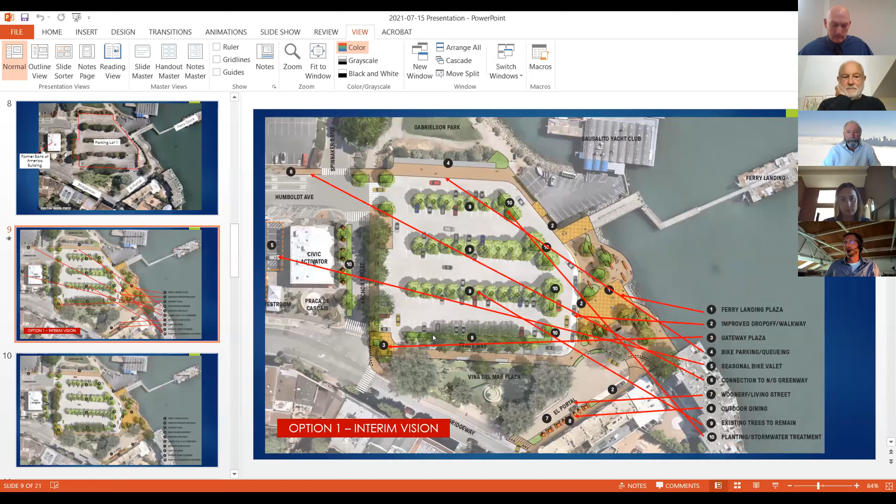All right, hopefully everybody can see my screen. It says the Ferry Landside Improvement. Yep, great.

This evening, I'd like to introduce some folks on the call, who are part of the local architects group and have really helped out quite a bit with the City of Sausalito, donating their time to this project. This would be Bill Hines, Michael Rex, Jacques Ullman, and Bob, who have really stepped up to help with the project. This evening, I'd like to start with a short presentation on the Ferry Landside Improvement Project, just to get everybody up to speed.

The second part of the program this evening is a presentation by the local architects group regarding their vision for the parking areas around the Ferry Landside area, with a bit more detail on parking lot 1. I'm hoping we can have public comment after each part to address the different nuances of each portion of the presentation. Even though the slide notes about an hour, if we finish the first part early, we can jump right into part two, the visioning. We'll have different speakers as well, as everybody knows.

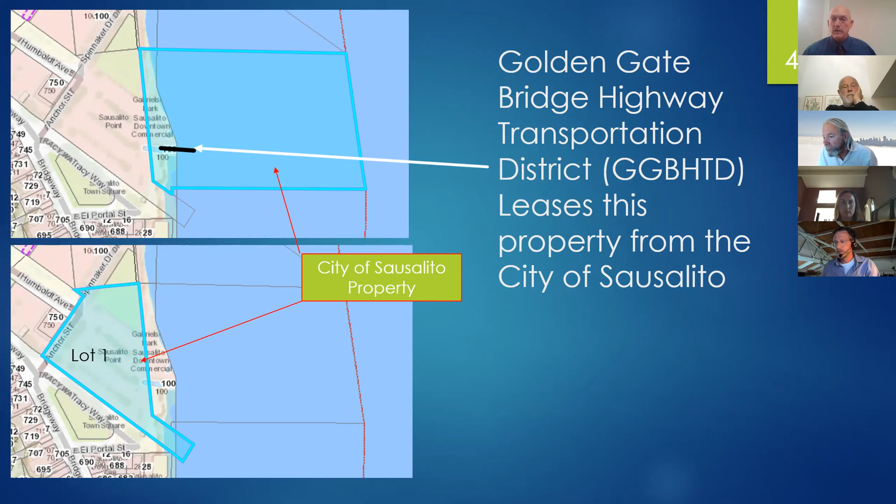I'll give a little background, just a couple pictures. The city owns the area where the Golden Gate Bridge Highway Transportation District docks their ferry. The city leases this property to the district. The district is planning to replace their existing ferry dock, and postponed that work during the recent pandemic, now anticipating starting construction in 2022. A little about their work: in order to replace the existing ferry dock, the district anticipates utilizing the existing dock, and I'll show some stuff on my computer here. Here's the existing dock—they're going to build a little walkway.

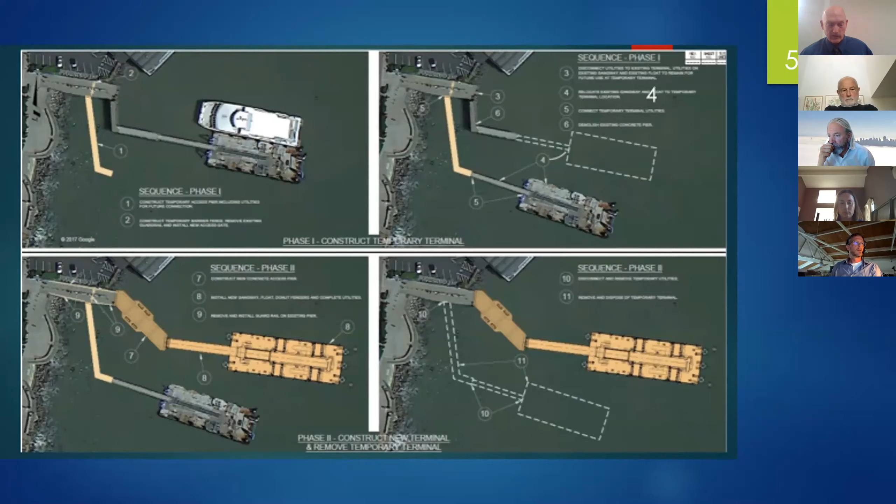They'll move this one over in order to build a new ferry dock. At the same time, they anticipate running the ferries during this construction. Most of the work on the ferry dock will be performed from the water side. However, the district has noted that the contractor may need a laydown area in parking lot 1 if they intend to do some work from the land side.

In October 2017, the city granted conditional approval to the Golden Gate Bridge Highway Transportation District to repair their dock system. Golden Gate has agreed to pass funding to the city from the Federal Transit Administration to support the improvements of the Ferry Landside project.

A total of $2.5 million is available at this time. This includes the design, construction, and construction management for the entire project. The grant language includes basic requirements to enhance the plaza area, enhance access to the ferry for pedestrians and cyclists, and includes circulation improvements as well as signage for the area. The project also requires installing a new ticket kiosk in the area. The local architects group stepped in and helped us with this specific project. The funding allocated to this project is also limited—total project cost of $2.5 million leaves approximately $1.9 million for construction. That's not a lot in this day and age.

Last year, the City Council recommended utilizing a local architects group to assist staff with this project. The group's goals included implementing improvements in compliance with a federal grant that conform with a long-term vision of this area of Sausalito. The main emphasis of this group was to develop design features that can be supported by the funding available for the project.

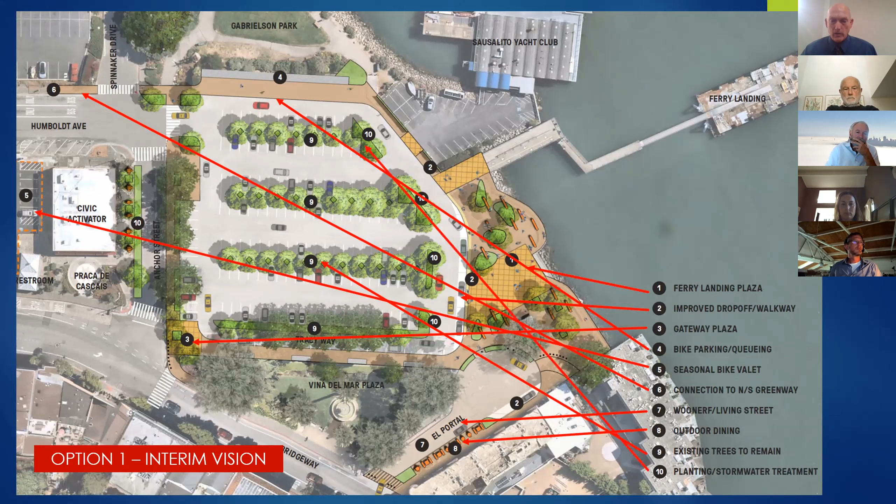Our arrows are kind of mixing up on the screen, but I want to run through these: a connection to the North-South Greenway and a more pedestrian-friendly area on El Portal, including outdoor dining. The intent when these folks originally looked at the plan was to keep the existing trees. Keep in mind this is a preliminary sketch, and once our engineer dives into the details, some of these may not stay in the plan because there isn't enough space. The group also looked at planting and stormwater treatment.

So that was the original schematic of option 1. The local architects group also came up with additional improvements to the area that can be added if funding is available. These include a pedestrian promenade from the former B of A building, as well as modifications to El Portal and pedestrian modifications in this area as well.

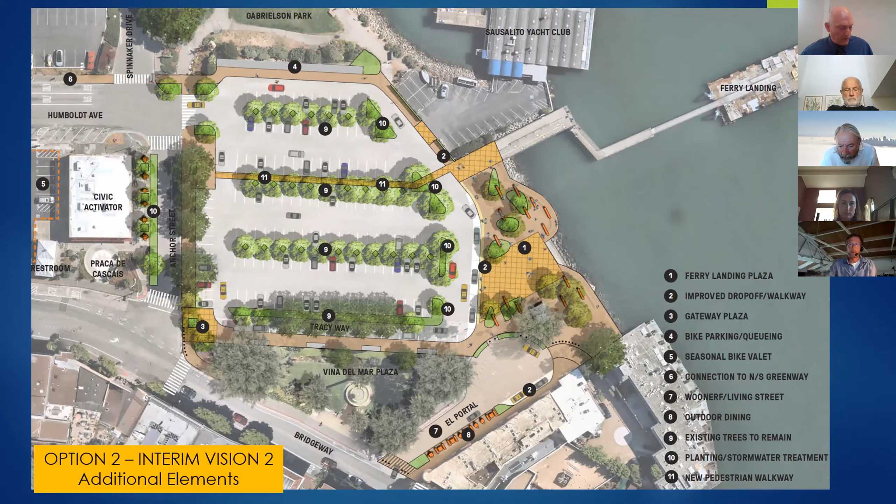Our consultant, BKF Engineers, and Becky Dower will make a short presentation in a slide or two. But looking at the details, there may be some issues associated with the trees, as I've mentioned before. Keep in mind that option 2 and option 1 are conceptual at this point. If this is pursued, there may be more reductions in parking to accommodate the promenade area, and a reduction of the bike queuing near Gabrielson Park may also be considered. If these alternatives are pursued, detailed analysis will be needed for the possible reduction in parking and other amenities. So with that, I'm going to turn it over to Becky Dower.

She is our consultant from BKF Engineers to talk about this detailed slide for looking at the engineering approach and developing a full construction set. So with that, I'll turn it over to Becky.

Thank you for the introduction. As Kevin noted, I am a member of the design team, and my role on the project is to take the conceptual design prepared by the architect group, as well as comments from the public, and turn those into drawings for construction. So on the slide in front of you here, this is a preliminary engineering layout of the improvements. This layout closely follows the intent of that conceptual option 1 that Kevin reviewed just a moment ago.

Underneath the exhibit, you'll see an aerial of the existing conditions, so that we can get an idea for how the new improvements relate to the existing improvements out there. Not shown for clarity only on this exhibit are features such as landscaping, furnishings, alternative concrete and pavement materials, etc. Again, those have only been omitted for clarity so that we can focus this discussion on the new improvements and how they relate to the existing features.

So the existing parking lot has 180 parking stalls. With this layout shown in front of you, we can accommodate about 157 parking spaces. That reduction of 23 parking spaces was made so that we can accommodate an expanded plaza area, as well as a drop-off area that Kevin had mentioned earlier. The amount of area transferred from parking lot use to plaza use is about 6,000 square feet. So said another way, the plaza is being expanded by about 6,000 square feet with this option.

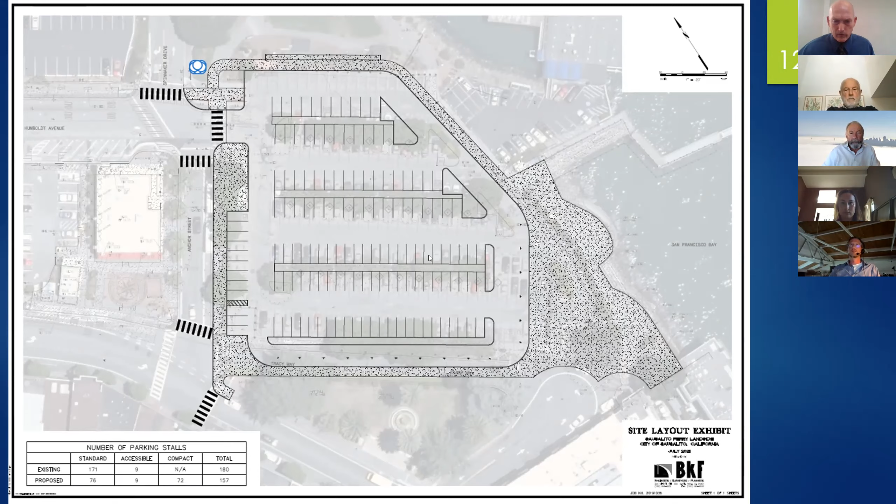Hold on, I think my screen got locked. There we go. Now I'm hoping that we can get public input.

I'm going to read through something first to hopefully jog folks' thinking on how to respond. For this part of the evening's presentation, I'm hoping to hear from each of you about what is proposed for this area of Sausalito. We kind of ran through that and I'm hoping you can comment on it. If you could limit your comments to 3 minutes, that would be great.

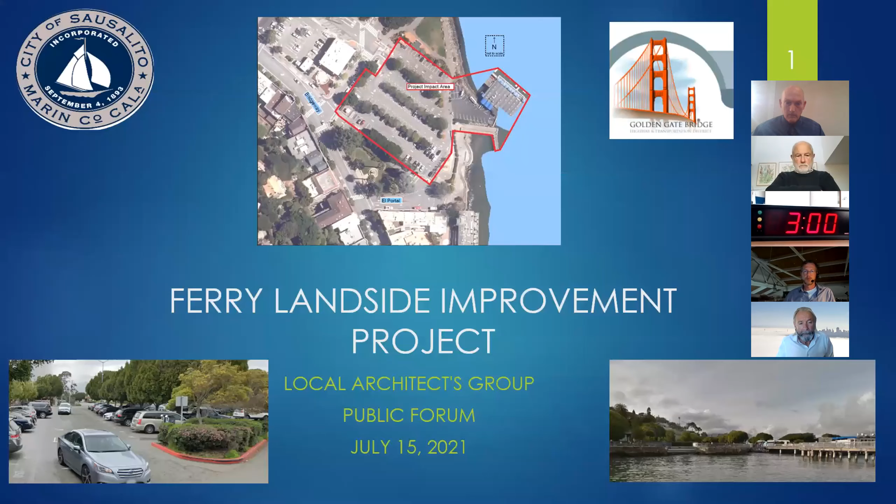For the last six months, the local architects group has been working on a long-term vision for this area. The scope of their vision generally looks at parking lots 1 through 4 and basically asks what can we do with this area of town. Their specific focus has been on parking lot 1, because that's where we've needed their help the most. Currently, there are no additional funding sources for this work beyond expanding past parking lot 1 with funding coming from the Golden Gate Bridge Highway Transportation District. However, some improvements we've described earlier may be impacted by what is intended with the long-term vision.

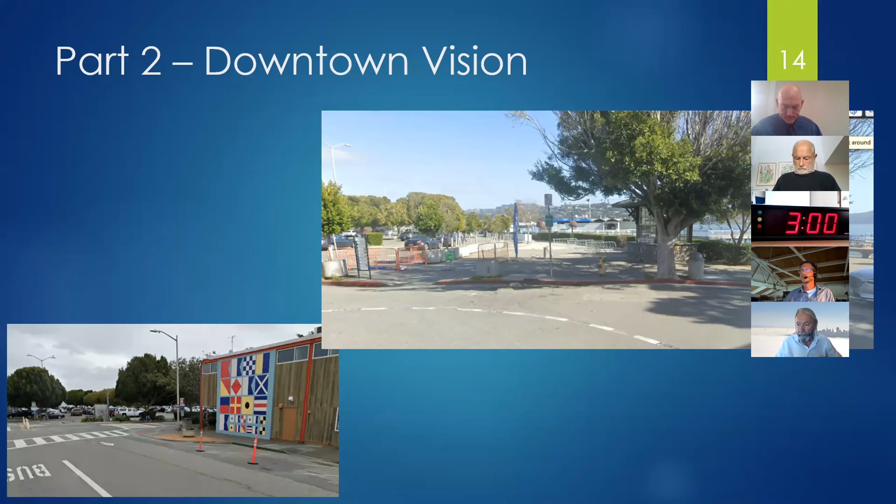A concept of what could be changed in this area of Sausalito came up early on when the architects just looked at lot 1. We've got things to consider, such as the parking setting. What could happen here? Do we keep the parking? Do we have partial parking? Do we look at a park setting? There are all sorts of alternatives here, and these amazing folks have taken a lot of effort to look into it.

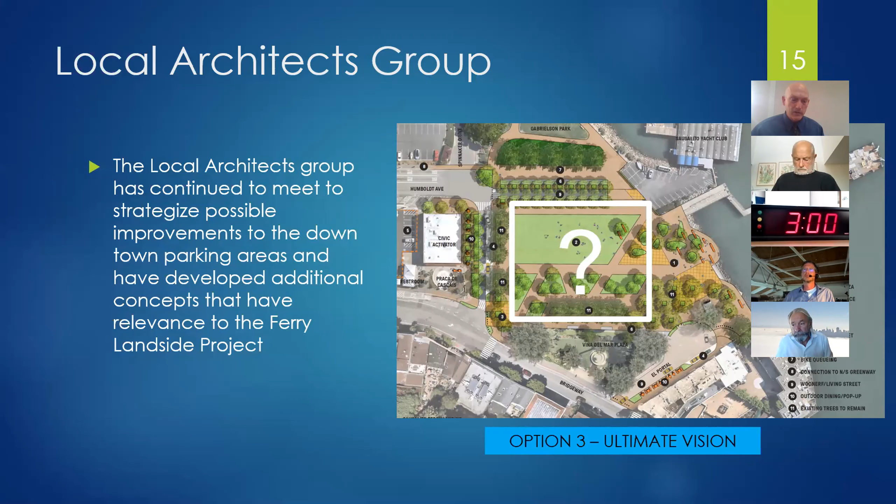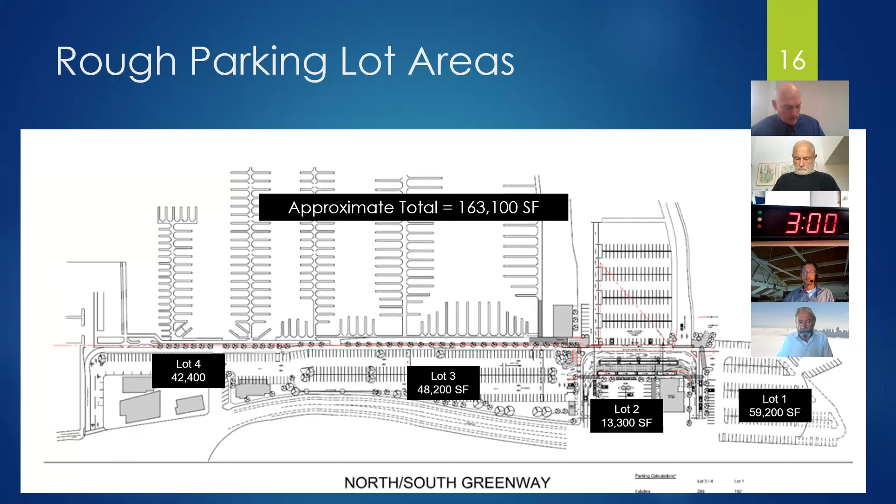Keep in mind that all of these parking lots 1 through 4 are generally connected. I've got some rough numbers up here—these are just approximate numbers of square footage, but like I said, they're all connected. With that, I'd like to introduce Bill Hines. He's going to take over the PowerPoint presentation and walk folks through some of their concepts. When he's finished, I have some additional questions for the public—we'd love to get your input as well. So with that, I'll turn this over to Bill, and thank you so much.

Thank you, Kevin. I'm assuming everybody can hear me okay. Great. My name is Bill Hines. I'm an associate principal with SWA Group, a worldwide landscape architecture and planning firm headquartered here in Sausalito. I've also been on the board of Sausalito Beautiful for many years, and I'm currently chair of design and leadership.

It's been a real pleasure working with fellow professionals on this parking lot 1 and ferry landing site project. This project initially got my interest several years ago, and we're excited to be at this point that engages all the various possibilities and stakeholders in a dialogue about the future of downtown. It's full of opportunities for beautiful, high quality public spaces with verdant landscaping and a statement about this unique community. Here's a photo of our site, part of downtown that's 91% paved from El Portal to Johnson Street, which collectively represents 12 acres of mostly asphalt that's undifferentiated for pedestrian use. There are many conditions that can be improved and represent opportunities. The Ferry Landing Plaza—this is an ideal view—should feature a waterfront promenade and a real imageable space.

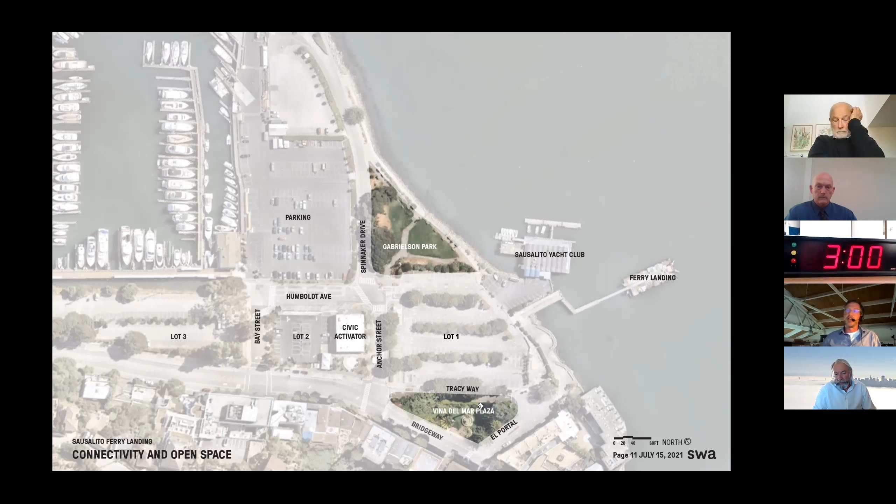So we've produced a few quick diagrams here just to show you how this concept would play out. Obviously, one of the most revered green spaces downtown is Vina Del Mar Park, and together with Gabrielson, they're kind of the green hubs, probably representing maybe 7.5 or 8% of the 9% of green area and green space downtown.

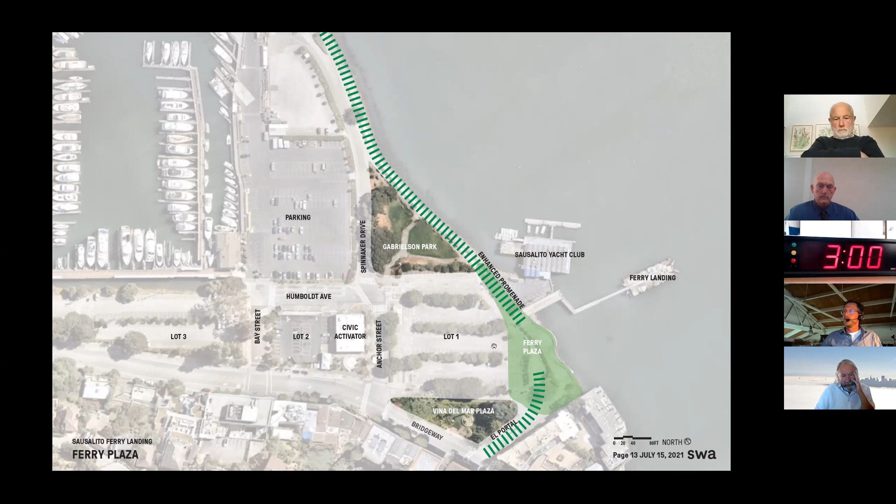There's the existing waterfront promenade, which heads up to Spinnaker and is the natural connection at the ferry landing, which is the midpoint between that and El Portal, which returns you back to Bridgeway. So there's a possibility of connecting all these spaces with this expanded ferry landing project. This is kind of the extent, loosely, of the interim plan: expanding this ferry landing plaza and making this connection here.

We've seen, through our studies and discussions about the possibilities for this parking lot 1, that there is potential to expand this area. And we think an important element, whether or not the expansion of the parking lot happens, is this gateway plaza at the intersection of Bridgeway, Anchor, and currently Tracy Way that I described earlier. Potentially, if lot 1 gets incorporated into that idea, there are ways of facilitating circulation between all these elements, and actually setting up the North-South Greenway, which could happen along Humboldt or potentially ultimately along Bridgeway.

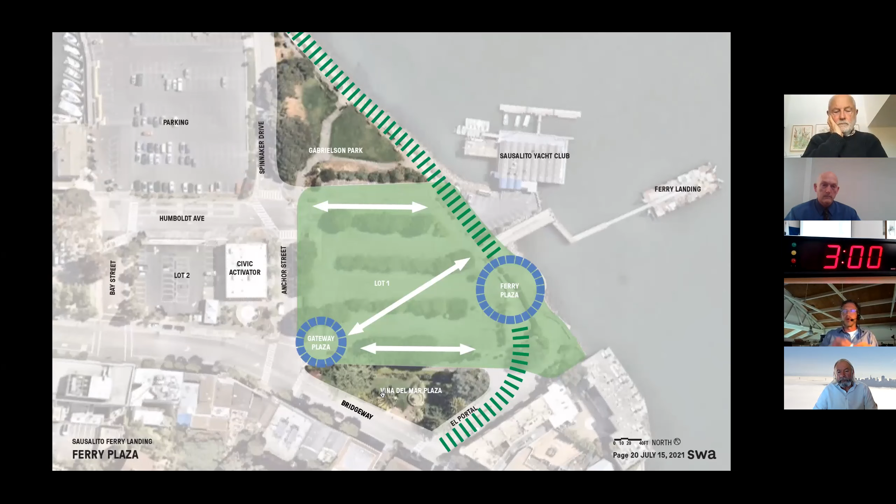So that's an overview, at a high level, of how we're looking at this plaza project. From that, we developed some basic principles of design that I'll quickly outline here, which played into our thinking and that we've incorporated into the project so far.

Waterfront views and maximizing views of the bay is a paramount consideration. Making a visual and physical connection to Gabrielson Park and the Spinnaker Peninsula is important, along with the connection to El Portal.

The focus should really be on pedestrian and bike improvements, expanding the existing footprint for better pedestrian circulation. We should really avoid repaving or restriping the parking lot, even though the condition is poor, especially given this discussion and the fact that we aren't ultimately sure what we want to do with the parking lot. The parking lot requires a pretty significant investment to keep it in parking, and I think the business case for that should be looked at further if repaving the parking lot is a favored idea.

There should be a sense of arrival in the plaza with wayfinding and distinct experiences, and an opportunity to diffuse in the space and have a few choices. There should be a starting point for future circulation routes along the waterfront and the North-South Greenway.

The access to the hotels, the drop-off and service on El Portal shall remain, but the street shouldn't be open to everyone to use. Expanding the sidewalk cafe adjacent to those businesses in a shared street bordering Vina Del Mar would be a great use of that space.

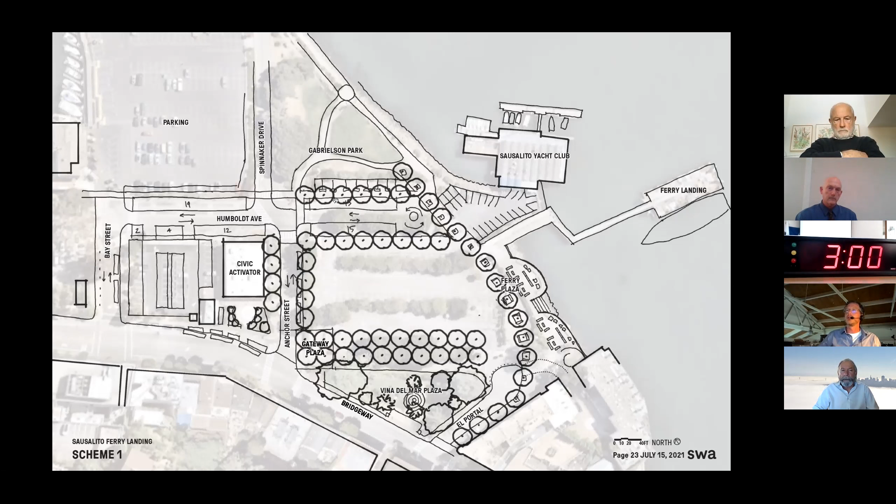This first scheme, scheme one as we're calling it, responds to the need to keep some convenient parking in current lot one. This could be seen as a strategy of reducing parking over time. But essentially from an urban design standpoint, the parking we're looking to keep here is situated in a way that it bifurcates Gabrielson Park from a potential plaza or park space in parking lot one. But because we need to facilitate access to the Sausalito Yacht Club, we don't think that this is necessarily a negative, and it may in fact represent some opportunities.

The drop off for the ferry landing would happen down Humboldt at sort of a turnaround. Bus drop off could happen along Anchor and Bridgeway and Bay Street as it currently does today. We show buses on the opposite side from Bay as they currently reside, in front of the Ice House.

And the bank of bike parking against Gabrielson is ideally situated along a natural circulation route for bikes. So this may be a bike parking area that's attended to when demand needs it, or it could just be a typical self-park type environment when that service is not needed.

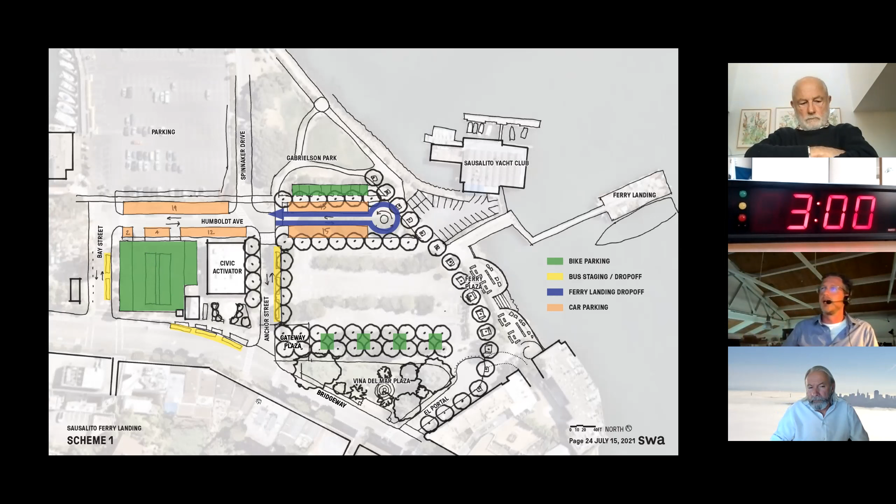So without getting into too much detail about the plaza or a park or exactly what happens in this program, this is sort of how we're seeing the surrounding urban design elements. As I mentioned, there are some variables in this scheme, based on the need for parking, bike parking, drop off, and access to the ferry.

So we took a look at another alternative here, which might function for a special event, thinking that there might be a zone of paving that could potentially be bollarded or closed off and still leave some access for the yacht club when a special event needs to happen.

Now the special event area could ultimately be a bike valet area. This could be a potential venue for a farmers market or pop-up booths, food trucks certainly. So the idea is that by providing some bollards here, we can close this area off and make it flexible.

And by doing so, make it a little bit more porous to people if we don't have constant vehicle circulation. In a scenario like that, the close and convenient drop off to the ferry landing would need a temporary staging location, and thinking that can happen along Bridgeway, with the drop off movement coming through here.

It's interesting to note that the distance of walking from the ferry boat to the ferry landing is really about the same as walking from the ferry landing to the B of A. And I'd add that most people, if they're going to San Francisco, usually have a bit of a walk on the other end. So asking people to walk a little farther in a scenario like this is not totally unrealistic.

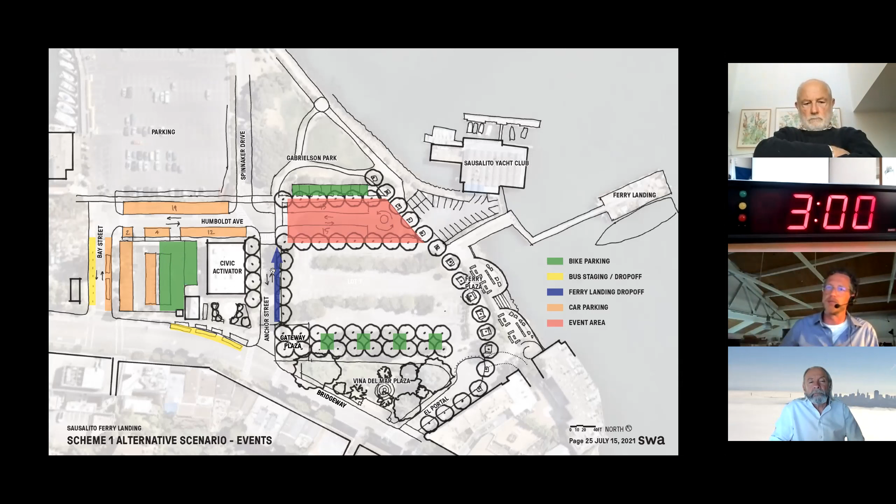So under this scenario, there'd still be a bank of convenience parking on Humboldt, which doesn't exist today currently, so these are new spaces. We're able to keep the existing spaces in Lot 2. The green area designated as bike parking could also function as regular car parking, so basically all of Lot 2 and the parking along Humboldt could stay intact.

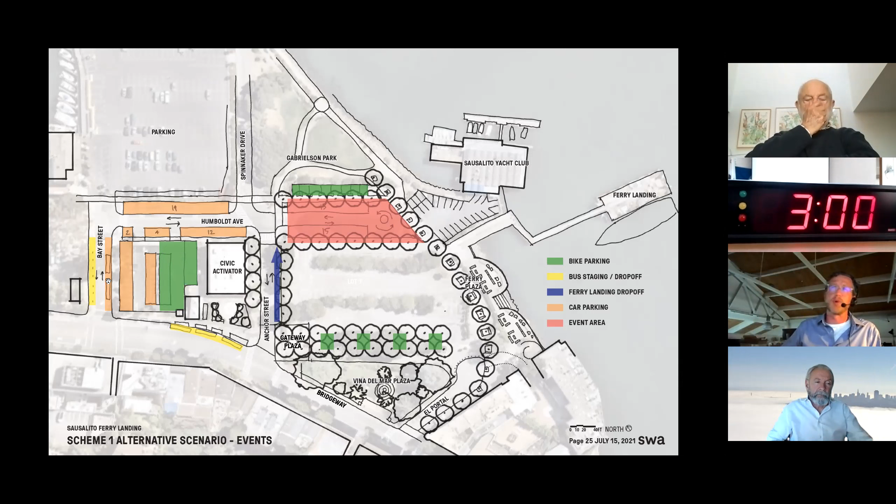And we can talk about people's preference for bus drop off, whether that's better to happen on one side of the street versus the other, if one side's cars, car parking versus bike parking.

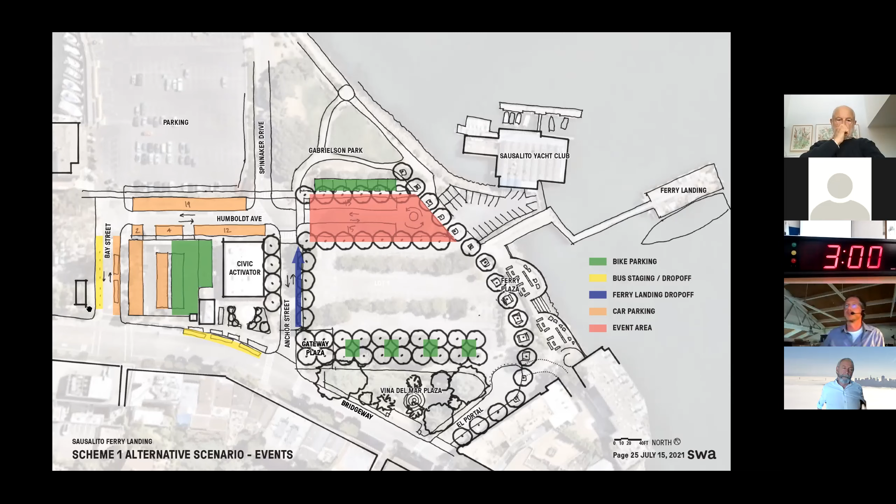So we have another scenario that we've taken a look at. This is the scenario that really just facilitates vehicular access that needs to happen for the parking and deliveries for the yacht club.

And really looks at formalizing this more as a plaza park environment, endeavoring to keep vehicles out of this zone aside from access to the yacht club parking, and takes another look at Anchor and whether it's fully necessary.

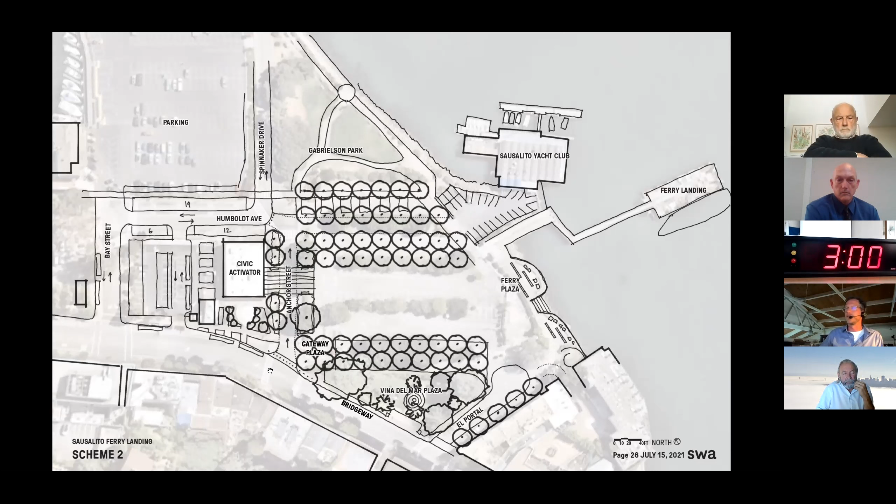It does that by keeping the existing bus staging along Bridgeway, making an entrance into parking lot 2 so there's actually a drive-through for the buses, and there could in fact be some bus drop-off back behind the B of A, with the parking there also functioning as valet bike parking on an as-needed basis. So this, together with the buses and bike circulation, is sort of a centralized hub of transit, especially if you're not driving a single occupancy vehicle.

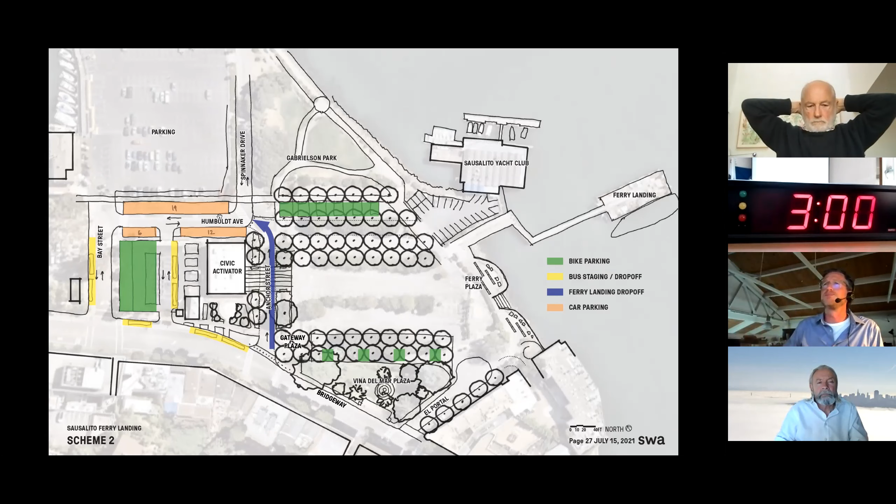In this scenario, we envision Anchor entry getting closed off by the Gateway Plaza. We envision Anchor as a one-way street that would bring you through and could bring you out through Bay Street to loop around the block. So the idea is that you could come in, drop people off for the ferry landing, and they could walk out through the plaza or park space.

The other ideas about bike parking are pretty similar - a fairly dense area of bike parking on the backside of Gabrielson Park, with some potentially small groups of racks along the sidewalk, along the back of Vina Del Mar, just providing a place for more locals to stash their bikes.

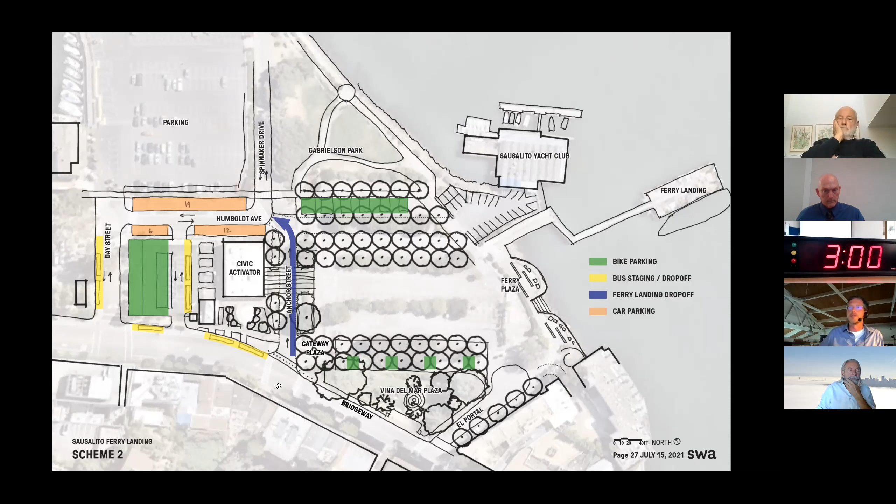We took a look at an event type scenario because one of the things that intrigued us in looking at the downtown design and the big picture was, is Anchor Street really necessary? And in closing Anchor Street, does that represent an opportunity to make the connection to the plaza or park space better than it currently is, and even better than we've seen in some of the different alternatives we've been looking at.

So the idea here is that we could have some temporary bollards that could be installed during special events or certain times of the year that would basically close off Anchor. We would still be able to provide access to the yacht club and their parking. But the idea with Anchor being closed is that you facilitate this pedestrian connection across here, and this could happen on an as-needed basis.

So the idea is that when Anchor's closed, people could be dropped off to the ferry landing right on Bridgeway. This Bridgeway streetscape has been expanded quite a bit to reduce the length of crossing. There could certainly be a bulb-out or other ideas for pulling in for a drop-off, similar to what we have here. But basically all this is available for drop-off.

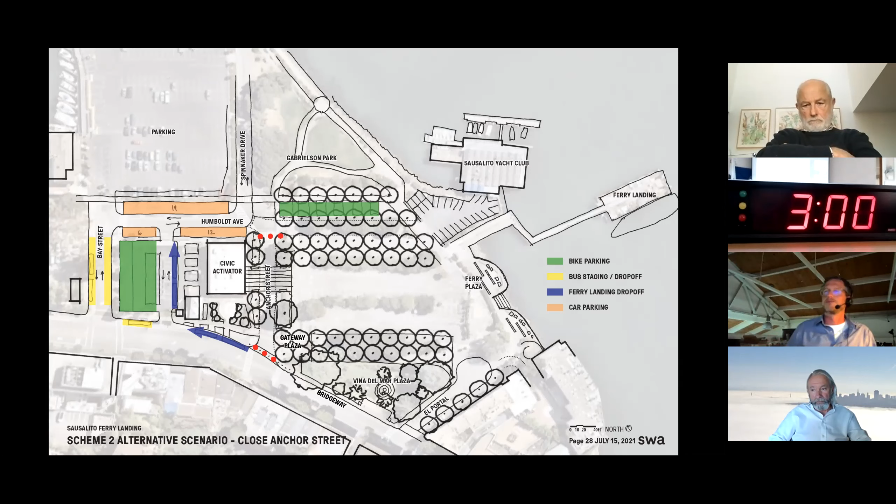We have a few key moments that we've tried to capture with a couple renderings. This view is down by the water, looking out from the El Portal intersection. And if we go back to some of the previous views, you recall that everything is kind of encumbered by some of the temporary guardrails and signage and other wayfinding elements that are in the courtyard now.

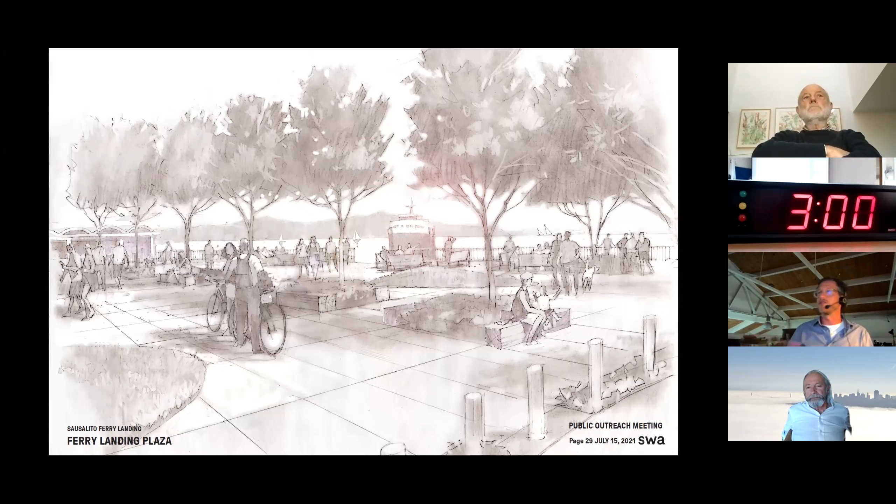We really envision this as more of an open plaza, with some planting and nice seating that would allow for a certain amount of activity at this end of the plaza. A lot of this isn't really baked into the current scheme. It's compounded by the fact that circulation is bifurcated by the hedges, guardrails, and temporary fencing that's put up. So this is the idea we're trying to espouse for the Ferry Landing Plaza.

We haven't done any full renderings of the parking lot, assuming it's going to remain a parking lot or potentially transform into a plaza, because we really wanted to reach out to you, the public, to hear opinions and thoughts on what you think should happen there.

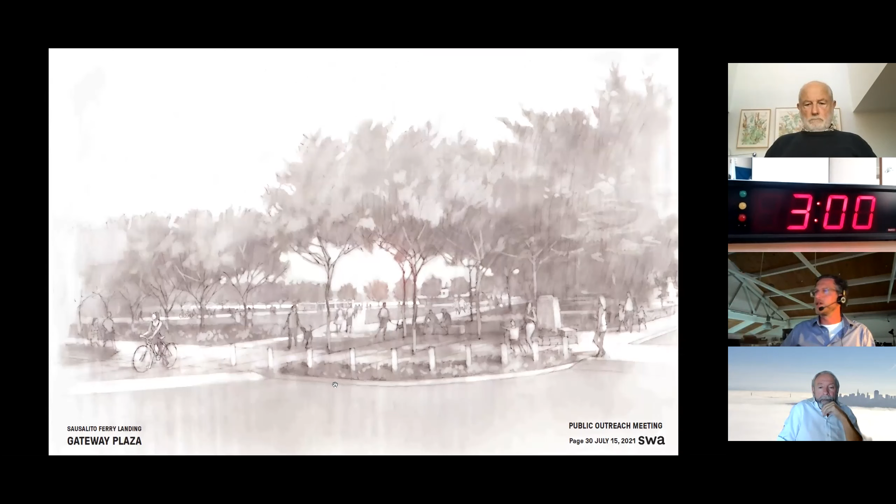We have done another rendering here. This is the El Portal—sorry, the Tracy Way, Bridgeway, and Anchor intersection. This is the idea about closing off this piece and the end of Vina Del Mar, capturing it as a gateway plaza. There's the possibility of setting up visual access to the ferry, with a long view across a flexible use space that could accommodate a bunch of different events.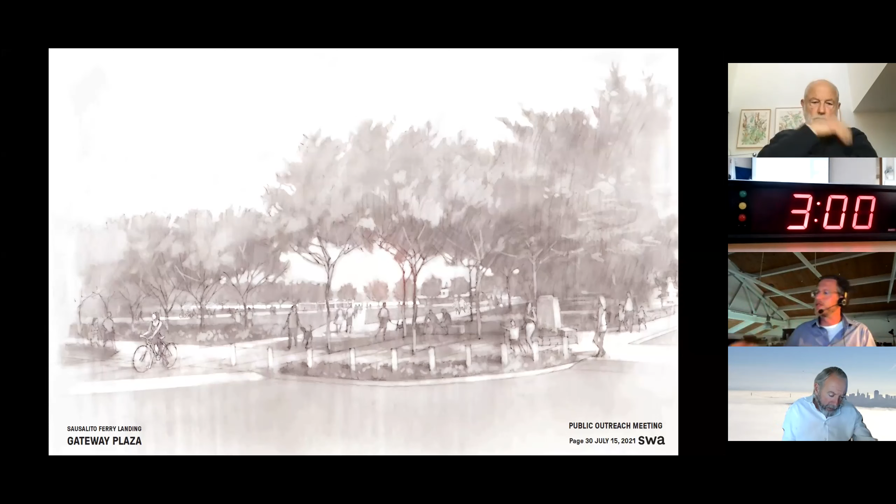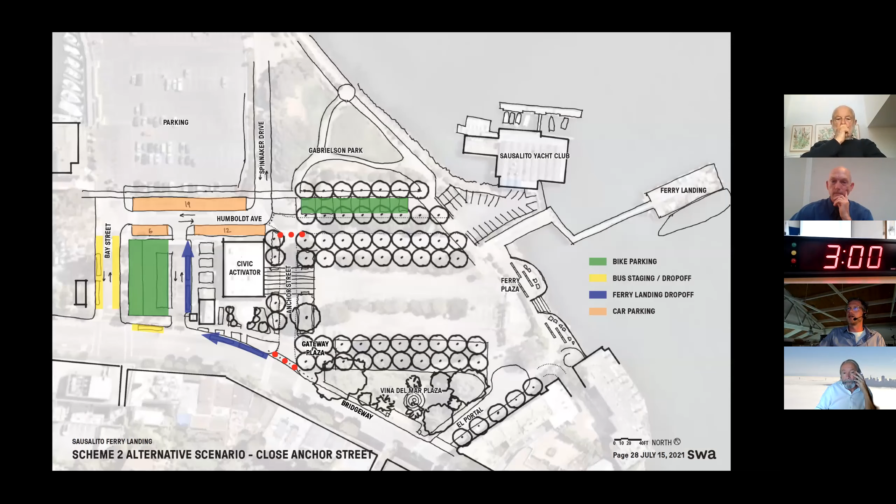I think we've talked about a number of ideas for this plaza and area. The big idea—going back to the diagram—is that the pedestrian and bike ideas shown in these design studies are really just refinements of existing use patterns we've observed on the site, trying to provide ample space for these different uses. There have been quite a few debates in our working group about the amount of plaza versus softscape.

There's discussion of how to situate outdoor rooms and gathering areas with furniture, thoughts about whether there's some topography, mounds, or a hill, whether there are event spaces of different sizes and what kinds of events they should accommodate, how bike circulation and bike parking should work, and how to think about planting trees. One potential thought is that trees could go in elevated planters so they're less vulnerable to sea level rise and a rising water table.

Certainly the expression of sea level rise response should be something espoused in this plaza. It may involve fortification of the shoreline edge, or it may involve doing less and allowing this area to facilitate outflows of drainage should a certain storm event happen.

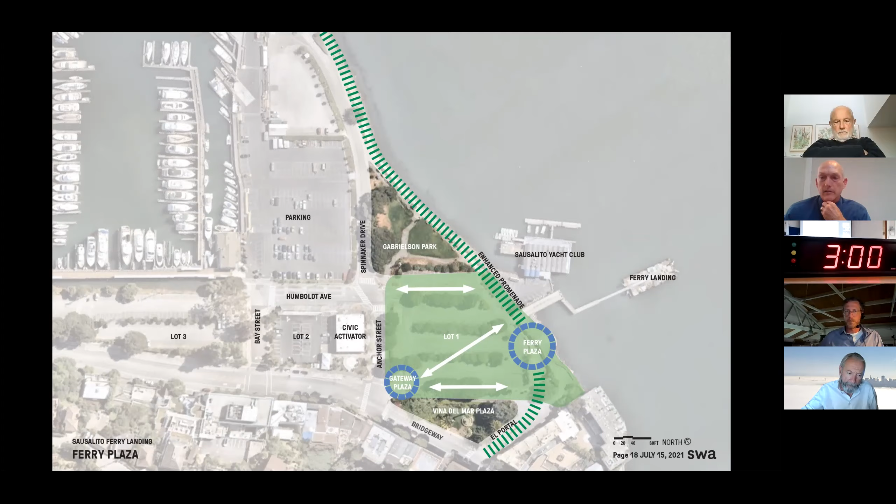Folks, as we take public comment, I don't think I have to read the paragraph again, but if you need to dial in, press star nine. Consider these questions: what type of changes should we be considering in the parking lots of downtown? Should we be considering a ballot measure that allows a park or different setting in this downtown area? Bill mentioned Ordinance 1128—should we pursue changing that slightly to allow a park setting or other amenities? Bill also mentioned a bunch of amenities, but I won't run through them all again.

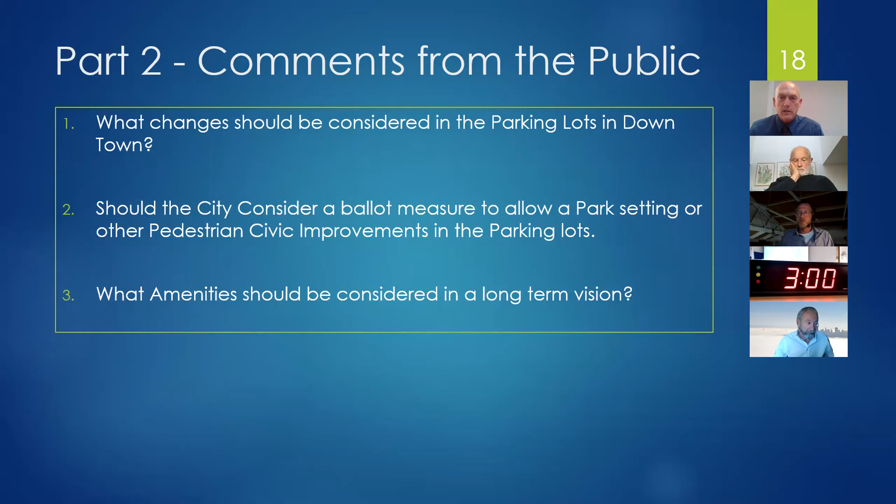Thank you, Kevin. Well, Jacques, when you made your comment, I had to raise my hand because you were asking the question I've been wanting to speak about. I didn't mention last time, but our family is a 20-year resident here in Old Town Sausalito at 4th and Richardson, and we have two children, 12 and 14. I'm also on the school board here in Sausalito, Marin City, and Sausalito Beautiful as well.

The reason I mention that is because, to your point Jacques, there's a huge yearning across our community to really enjoy our downtown more. It's not that people don't want the tourists to come, but it needs to have a calling, to have us come and really stay and enjoy, not just pass through downtown. I think it's because, to Bill's design, which I love—Scheme 2, the alternative one—the current layout is so choppy that it never really pulls you into the space for things like food trucks and farmers markets and picnics where we would bring our kids and hang out.

I think it would actually bring a lot of support to our local merchants down there. Right now, we sometimes think of them as a block, like 'oh, they're just serving the tourists.' But there are so many wonderful restaurants and boutiques, and I'm always surprised when I find something new, because I don't spend enough time there, kind of grounding myself in that space.